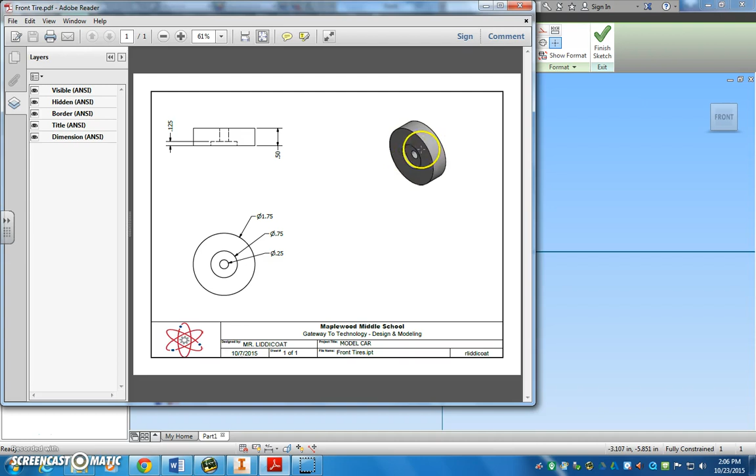We have a front view here, so if we look straight on at this ISO view, this is what we would see. And from the top, with our hidden line showing us what's going on with this cavity here and the hole going through the tire. Okay. So we're going to use all this information.

We're going to start out just by making the hole in the middle, since that goes all the way through, and we're going to also make the outside diameter of the tire, and we'll extrude it to the thickness, which is 0.5. So make sure we're using the numbers that are presented to us to inform us on how to make this.

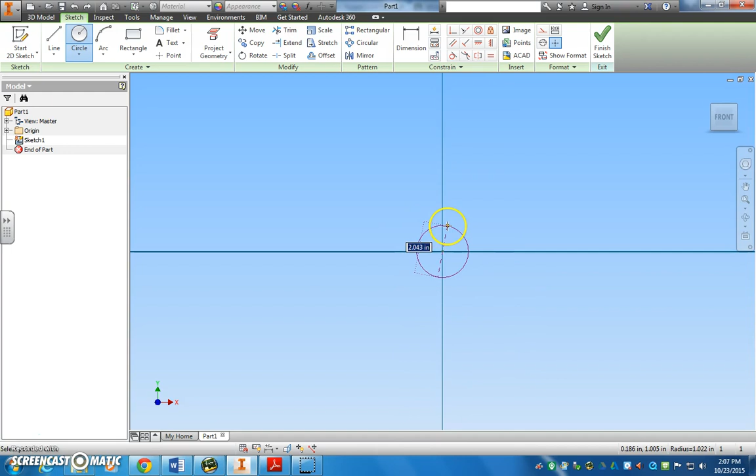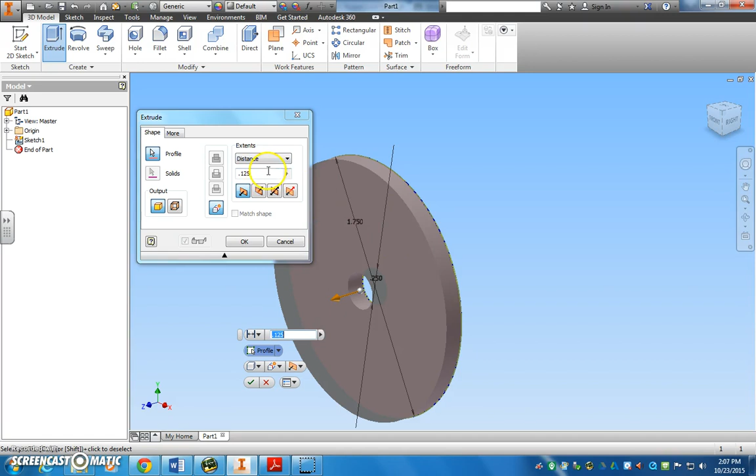So I'll take my circle command and make a 0.25 circle, and we're zoomed out here. Then we'll make a 1.75 circle, and what do you know? We've got a 2D tire going. If we hit our extrude command after finishing our sketch, we want to select our tire area here. And once again, remember our worksheet in that top view told us the thickness of the tire is 0.5. So we're going to extrude 0.5, hit OK, and we're halfway done.

I'm also going to start another 2D sketch on this face. It could be the front or the back face, doesn't matter which. And why I'm doing that is because we still have to get this cavity out of here. We've got to cut that portion out.

So if I look down at my front view again, I'll notice that that opening there is 0.75 in diameter. And don't forget to look at the thickness, how deep it recedes into the tire. The hidden lines tell us, with this dimension, it's a 0.125 cavity. So we're going to extrude cut 0.125 with a 0.75 inch circle.

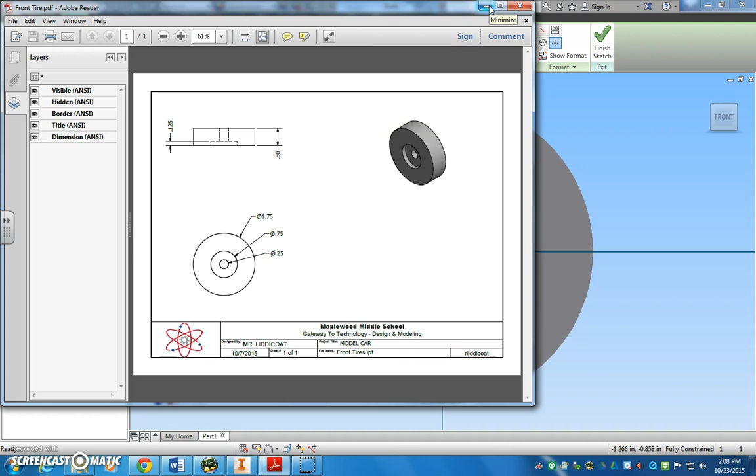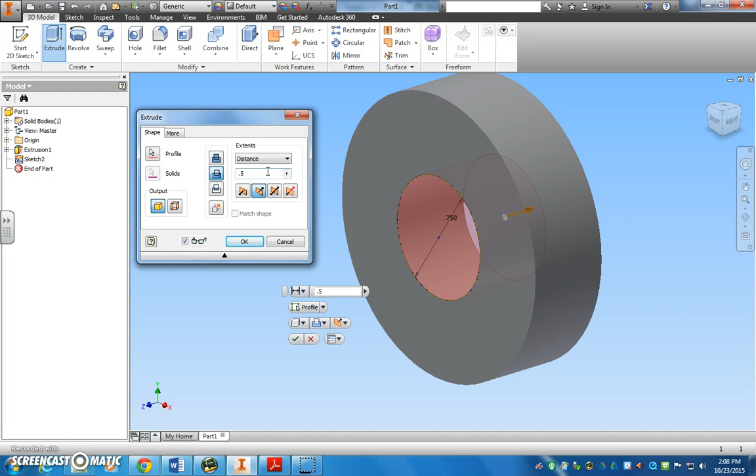Let's do that now. Take your circle command and make a 0.75 circle. Finish the sketch. Hit extrude one more time. And instead of adding material, remember we do want to switch over to cut. That's the middle of these three options here. So I'll switch to cut. Right now it's showing the preview cutting all the way through the tire. We don't want that. We want to switch to 0.125. You click OK. We now have our tire done. Now it looks like the worksheet.

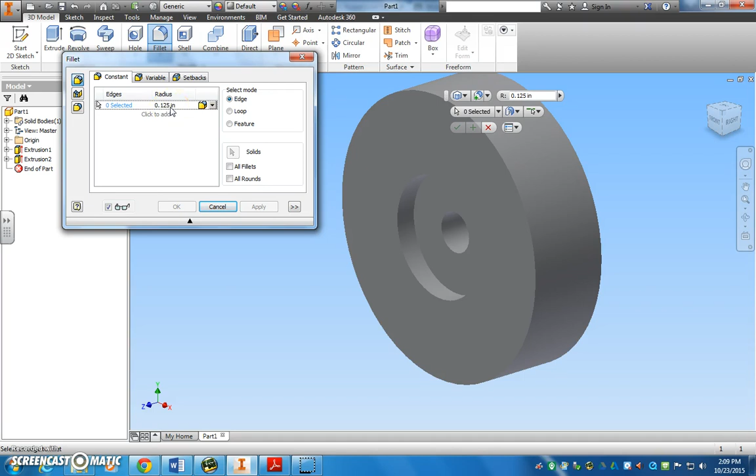The last thing that we need to do, and this is for the grade, is you need to add some fillets. Fillets, what it does is it simply takes a 90-degree surface and it rounds it over. The larger your number for the radius, the more it will be rounded. The smaller the number for your radius, the less it will be rounded. Let's take a look. I'm going to keep it at 0.125. And I'm going to start rounding some of my corners here.

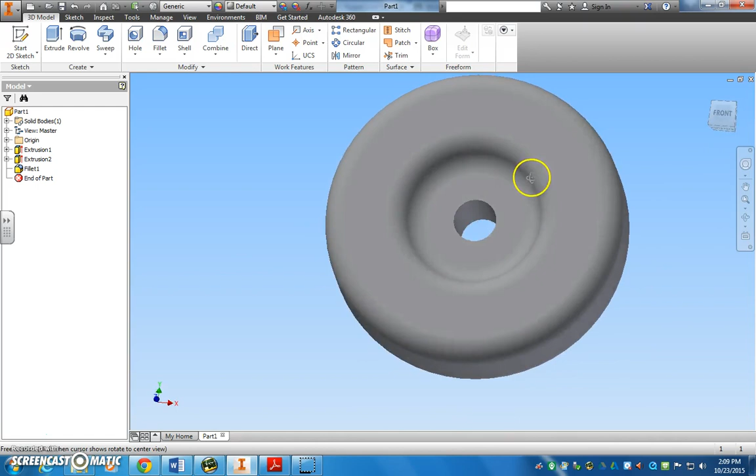Okay. And when I hit apply, it's just almost like it sanded those 90-degree corners off. Now they're nice, rounded. It looks more like a tire, less like something that the Flintstones would drive around. Okay. So, this is your tire. Make sure and put fillets on it. You can do the same process for the front and back tire, and I hope you're able to do the axle. It's simply a 0.25 inch diameter circle, extruded 4.5 inches.